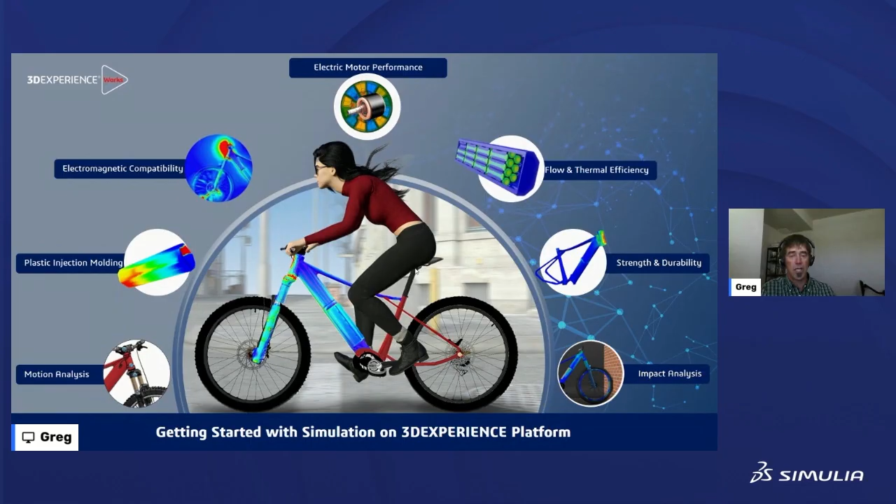How do we do strength and durability, impact simulations, injection molding, motion analysis, electromagnetics, because this is an e-bike. Maybe we have a Bluetooth cyclometer device up here. Maybe we need to look at electromagnetics of the battery, maybe overheating. So we're going to bring all these together in a full-on story of how someone would go through developing an e-bike. And that's kind of it.

One last slide. And again, this really kind of comes together at what my goal is. For many years, I have been focused in design or CAD integrated analysis solutions. One of the difficulties that we have as industry experts is there's not really enough simulation experts out there to accomplish all of the problems that we have before us, or all of the type of simulations we want to perform. If we gathered all of the high-end skilled traditional analysts in the world, we could probably fit the majority of all of them in one soccer stadium.

I mean, soccer stadiums are big now, right? We saw the World Cup this past year, and they're getting big. But really, if you think about it, that's not that many people. And across industry, if you think about one typical organization, they may have one analyst specialist to 10 or maybe even 20 designers.

And so my goal, again, is to bring those communities together, enable more people to be able to do more simulations, no matter what your skill level is. You can do this as a design verification, validation tool. Maybe just make some simple changes to the model, see how it performs. Is it going to deflect more? Do I change where my stresses are? Of course, we want to know if our parts are going to break, but sometimes we can just use it as a simple design tool to find out where our high stresses are, or how it's going to displace.

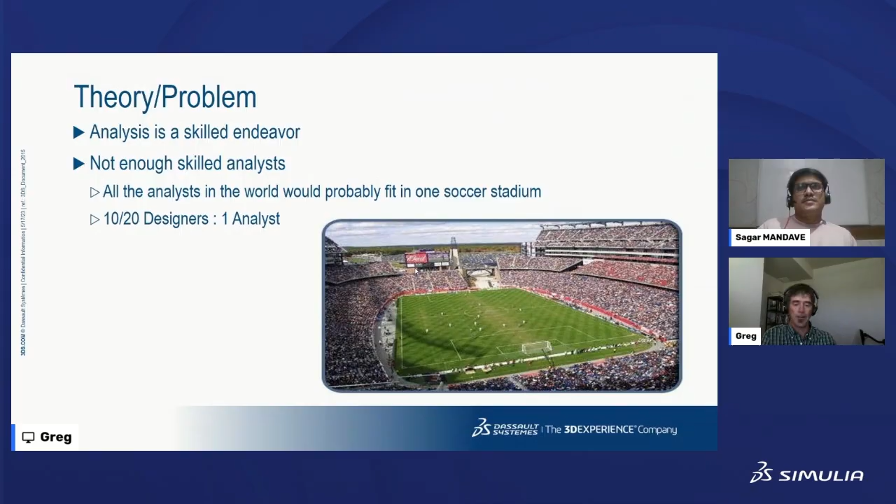So there's a lot of advantages, from a high-end simulation, electromagnetics or whatever, to just basic rudimentary using it as a design tool. And so that's my goal, is to really bring those communities together and get more people using the software so you can design better products faster. All right, that's enough. Yes, Greg, I do agree with you. If you get the insights of a product well before it's manufacturing, then it's way better.

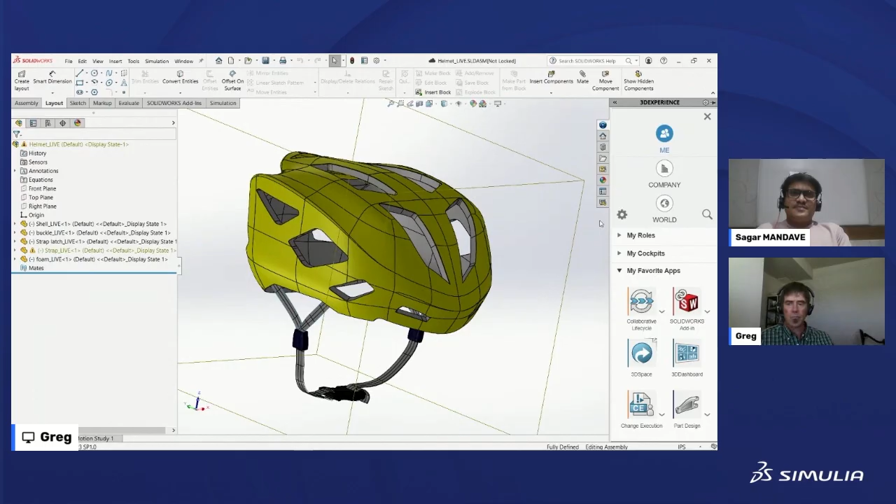So part of riding a bicycle is wearing a helmet. And I thought this would be a really nice place to start, rather than going into a complex assembly with weldments and different things like that. I want to give you a brief overview of taking a product from design through a quick simulation. I'm by no means a good SolidWorks user. I know enough to get in here and basically take some stuff from SolidWorks to 3DEXPERIENCE, because that's where my skill set is at.

So we have this part. We can see over here, it's an assembly comprising some different components. And one thing that you'll notice I have over here on the right-hand side is a simple add-in that enables us to start to interact with 3DEXPERIENCE. So you're able to work in your normal SolidWorks environment.

Immediately when I hit save, even if I go and hit save up here, what happens is that if you're connected to the 3D Experience Cloud tenant, it will take this information and save it in that particular cloud tenant. And the great thing about that is now everything is connected. So in the end, when I start to create some results and I have some simulation displacements and stresses,

I'm so bad at organization. I have a folder system. Me too. Yeah. Especially, you think engineers are type A people, but yes. I'm maybe like a type A minus. Who knows?

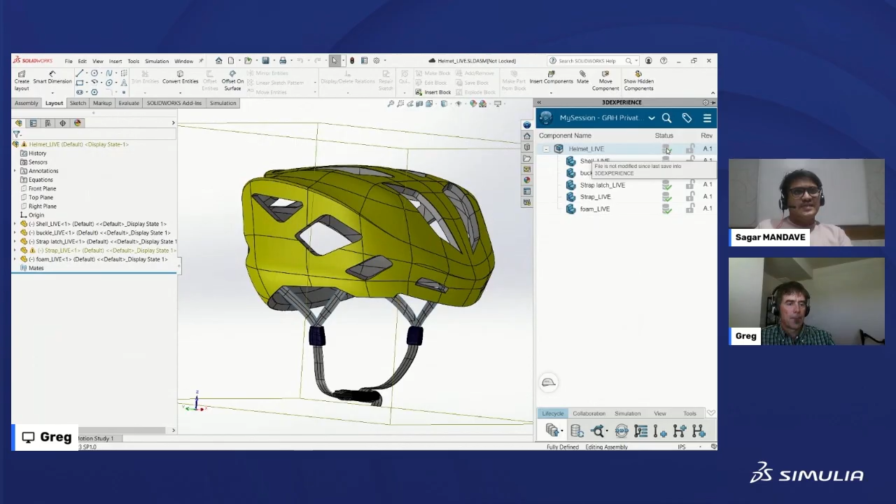So Greg, if that green tick is there, that means it is saved on cloud, right? Yeah. That green tick means it's saved on cloud. Prior to this, I had to do some setup. I had a little yellow "click me, save me to the cloud." So it would tell me here that it was only saved locally on my desktop and not saved to the cloud. Yeah, exactly right. See, organization. It even tells me if I've saved it or not, right?

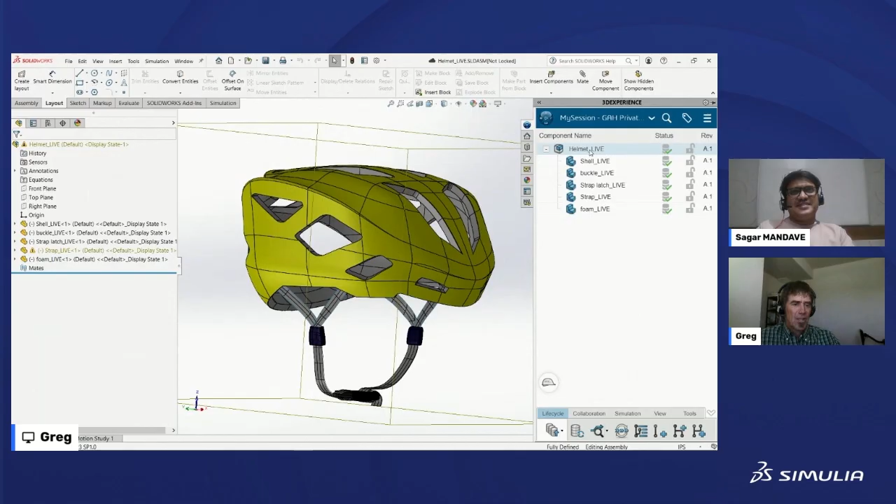Yes. So I can highlight any one of these parts, and if I want to go right to creating a simulation, I have this nice little tab down here, and I can pick simulation, and it will launch 3D Experience. It will start to create the structure that it needs for a simulation. But I'm a little old school. I like to do things a little bit more manual.

So when I clicked on the compass here, that shows me all of the roles or licenses of things that I have access to. And obviously I work for the company, so I have a lot of access. Maybe they should take some of my access away. But no, you are the prime expert from us.

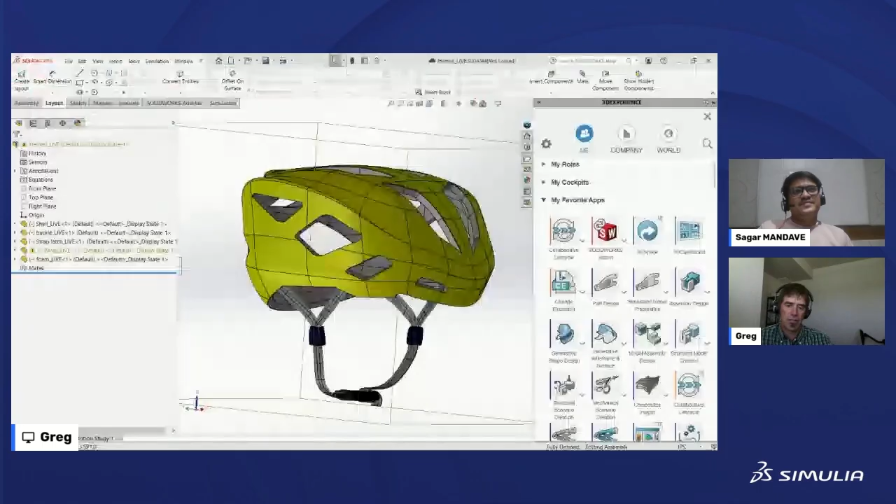Yeah. So I'm going to select something called Collaborative Lifecycle. This is my favorite one to launch in. It basically launches 3D Experience into a data management sort of environment. So we can see 3D Experience is launching here, and it launched in a screen behind. So now I can just Alt-Tab to the screen here, and we can see here is that helmet that loaded inside of my 3D Experience session.

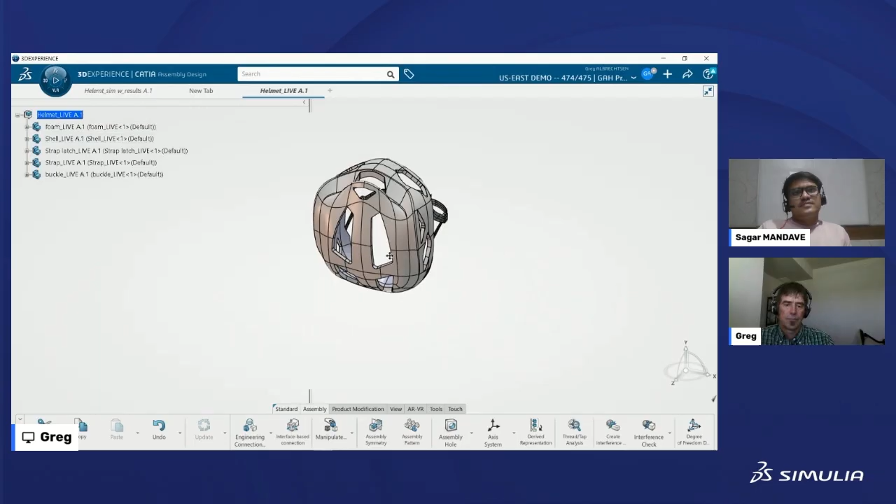So the only thing I need to do here now is just go ahead and right-click, open it. And there we go. Now I have the helmet. So we can see it has the same basic structure. I have a compass. All this. Nothing is left behind. He has carried everything. Yeah. Right.

I'm not going to get into this today, but if I had created a SolidWorks simulation and done the same thing, that would have brought the SolidWorks simulation in here and put it in 3D Experience format. So it would have brought the mesh over, the materials, the loads, the boundary conditions. As long as those sorts of items are supported here, it would have brought those over, and the majority of those are supported.

So again, if you just want to add that higher level of fidelity or a more expanded level of simulation, we can go ahead and do that directly here as well. One of the other things that's really nice is this is the structure. So if I start expanding this, I see this little do not enter sign.

What that means is the write privileges to modify the geometry have been retained in SolidWorks. So I can defeature, I can do all sorts of geometry prep here, but the actual authoring and ownership of the model to modify the features and parameters and those kinds of things, that still exists and is managed by SolidWorks. And so that's kind of a nice thing to think about.

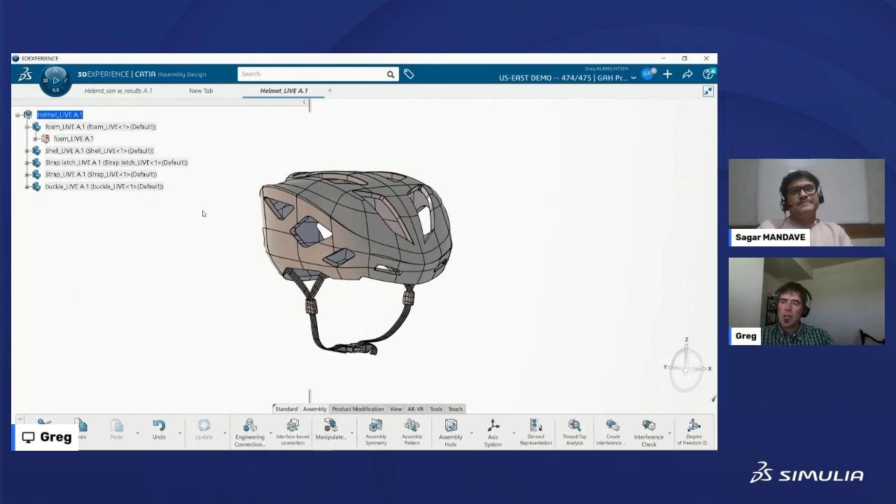Yeah. And I think in a later session when we start talking about optimization and design of experiments, we'll talk about how features or parameters can move between the two systems. So let's create a simulation, right? That's why we're here. So I'm going to go up to the compass. We have a lot of different tools, but I'm going to go to something called mechanical scenario creation.

And this is going to create the structure that I need for a simulation. You'll notice it didn't look like much happened, but I have a new simulation tab up here. My helmet is now under this physics simulation, and it's asking me some questions. The first thing it wants to know is what type of simulation am I going to run. I'm just going to take a lot of defaults today and keep it with general, so a basic static simulation.

If I had already meshed this model in a previous simulation, that would show up here. And that's one of the great advantages: I can reuse meshes from other simulations. So if I'm running various types of load cases, I don't have to mesh it every time. I can just reuse. And that extends through this whole scenario. But I don't have a mesh, so let's make one.

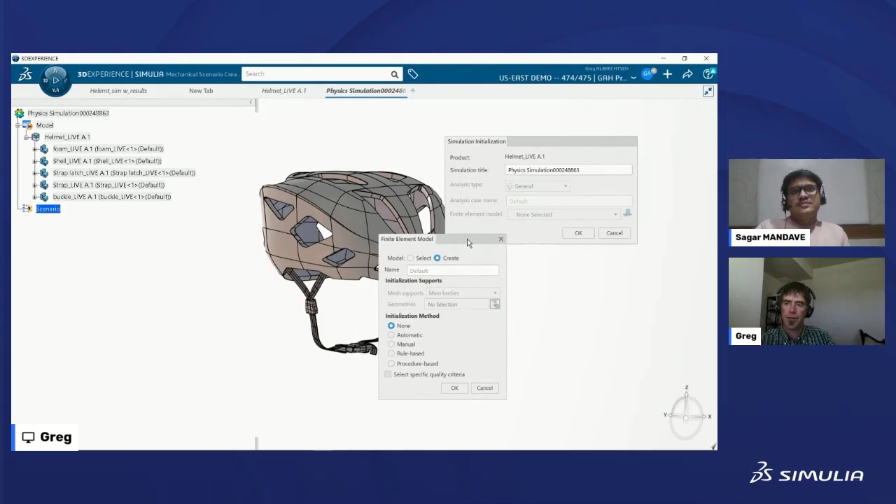So I'm going to create something that we call a finite element model, finite element mesh. I have a number of ways to do this. If I just hit automatic, that's going to look at this tree here, and it's going to create an element placeholder for each entity in here. I don't really care about the straps and stuff like that. That's not really going to pertain to the model.

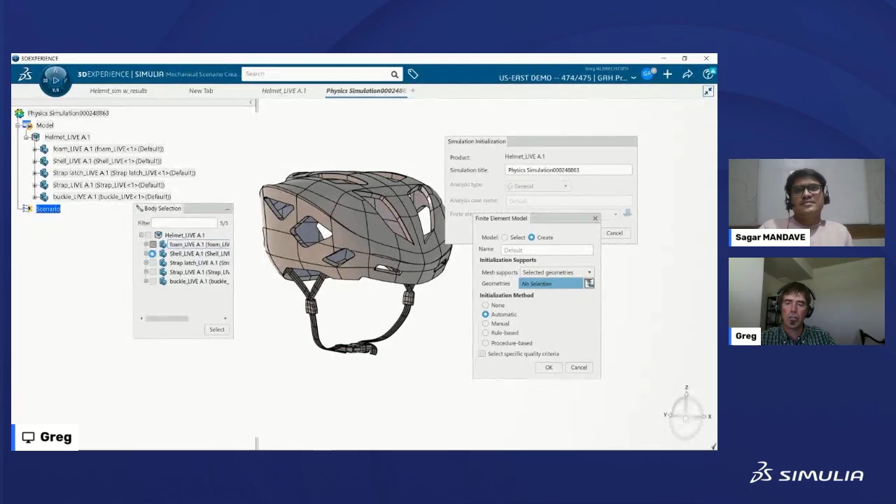So classically, you'd be like, oh, shoot, I need to go back to SolidWorks and remove those, but I don't need to, because in this model I can basically just tell it which items I want to include in my particular simulation. So I am just selecting those items that I want it to create a mesh entity for. I just selected the foam and the shell.

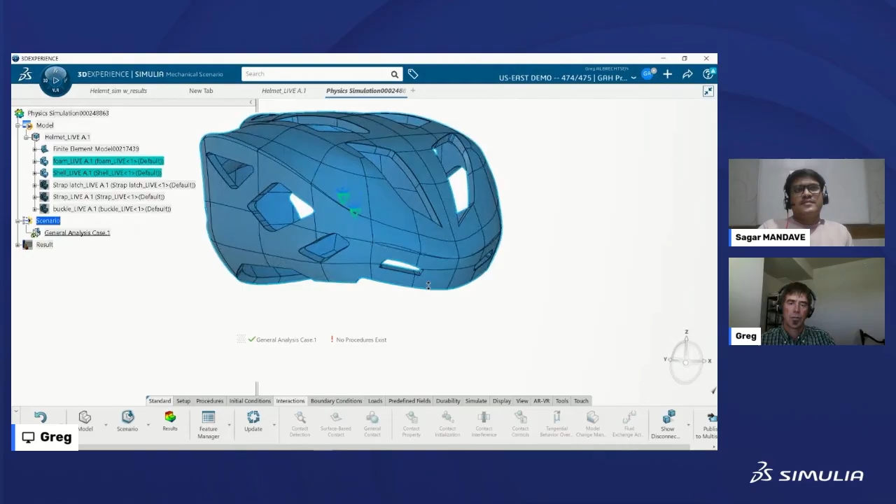And all these parts will stay in the history of the assembly, but when it creates the actual simulation, it's going to hide them, remove them. So that's pretty nice. I can still keep the integrity of this model. Maybe if this is a bike, I want to just run a quick simulation on the frame, and later down the road I want to add those other components in, I can do that. I can come here and add or remove items as I wish.

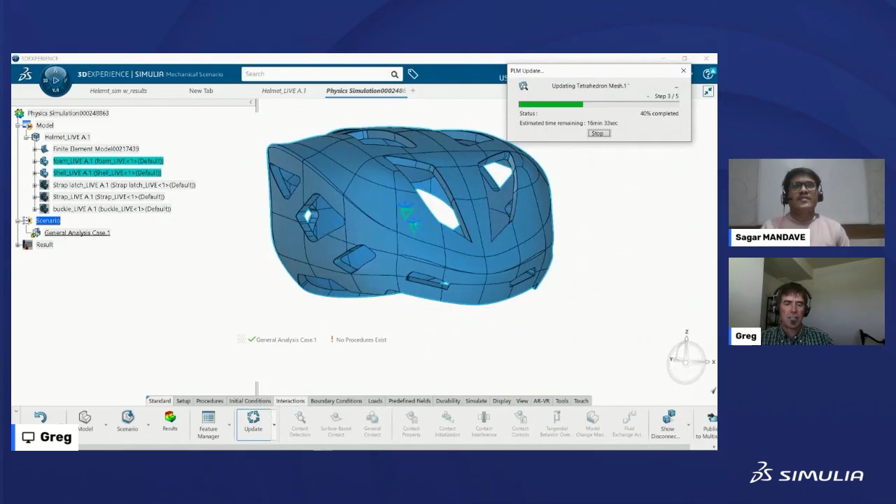Okay, let's go ahead and hit update. You can see it assigned a default mesh size here. I can go in and modify that, change it to whatever size I want. I'm just going to go ahead and do the default. I'm going to close that.

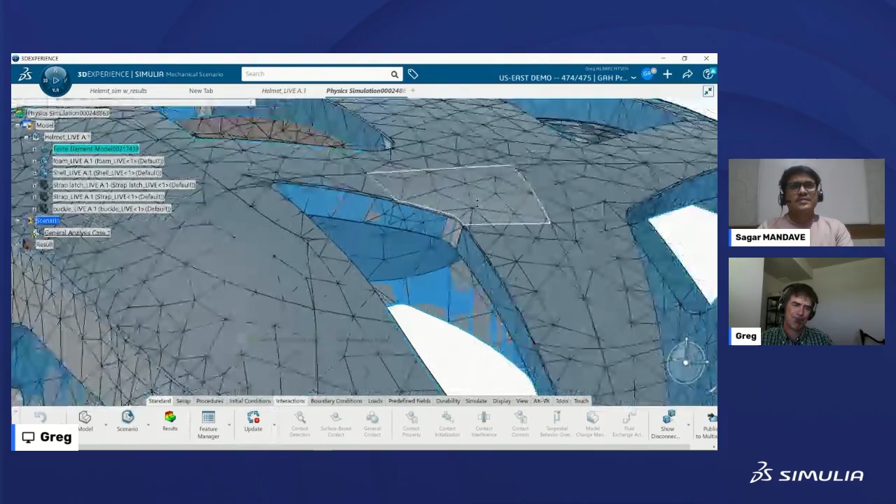We can see that my foam is pretty thick and my shell's pretty thin. If I'm meshing something this thin, it's probably not a good idea to use TETs. For the foam, TETs are perfect, they're fine. But for the shell, TETs aren't going to be a good thing to do.

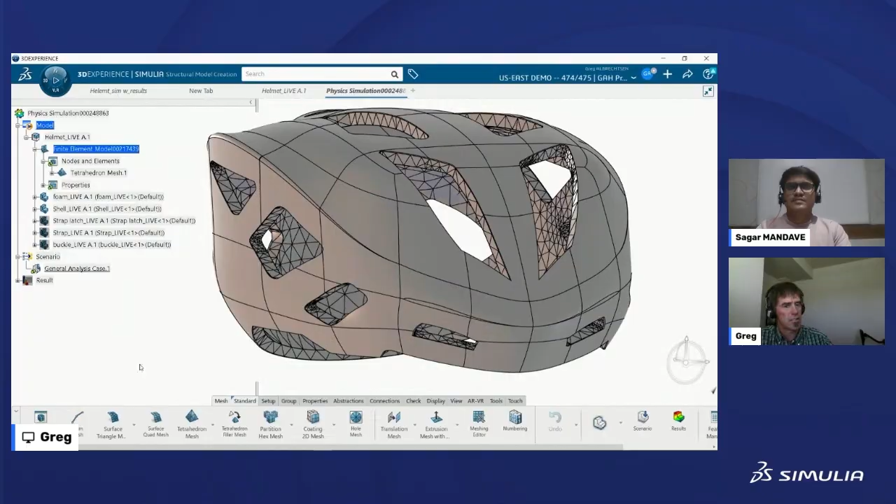So what I'm going to do is override what the default mesh told me, and create a manual mesh that's a little better for that foam, or for the shell. Let me hide the foam, hide this thing. I can do all sorts of stuff, work in a different little context.

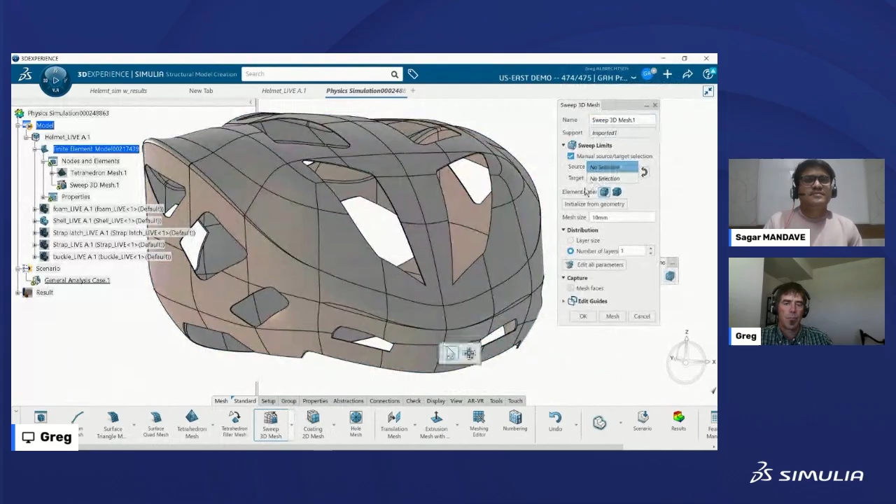So what I'm going to do, I'm going to create a hex mesh. And I'm going to pick this for my item. I want a hex mesh, and I'm going to basically create a sweep hex mesh.

We have a nice tool here that allows me to pick the inside surface. Let me get some dialog boxes out of the way here. I'm going to say propagate, and that's going to pick all of the inside surfaces. And I'm going to say I want to sweep to the outside. Move this back over here.

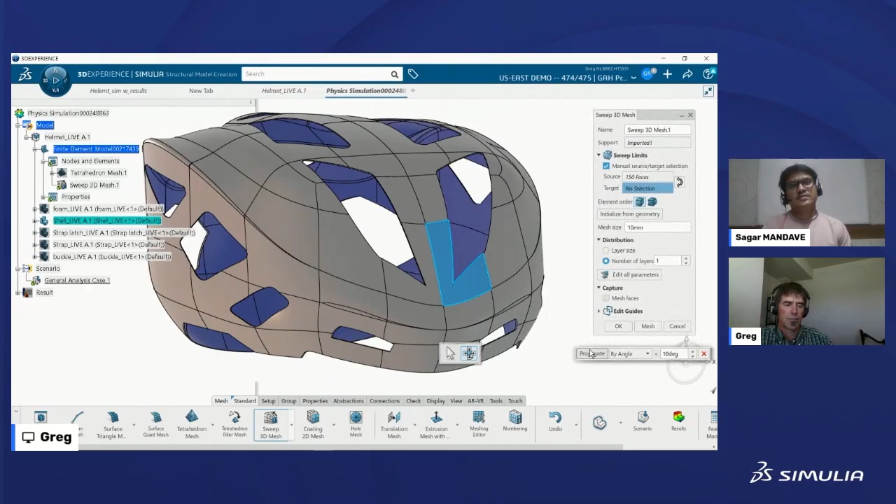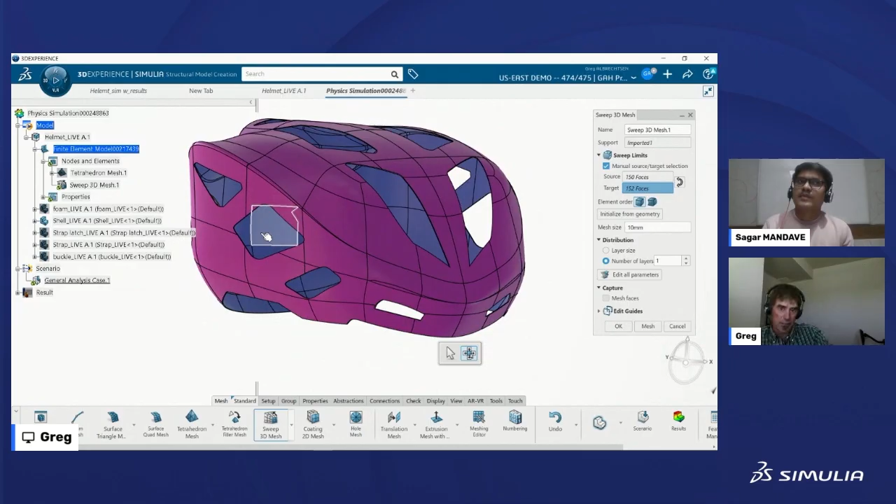So you are creating mesh for the shell from the bottom surface to the outermost surface, inner surface from the outermost surface. Yeah. So basically the software is going to create a quad mesh on this inside blue-purple surface, and it's going to sweep or extrude that through to this other purple surface here. And that allows us to create a much better mesh that has better refinement for this type of simulation.

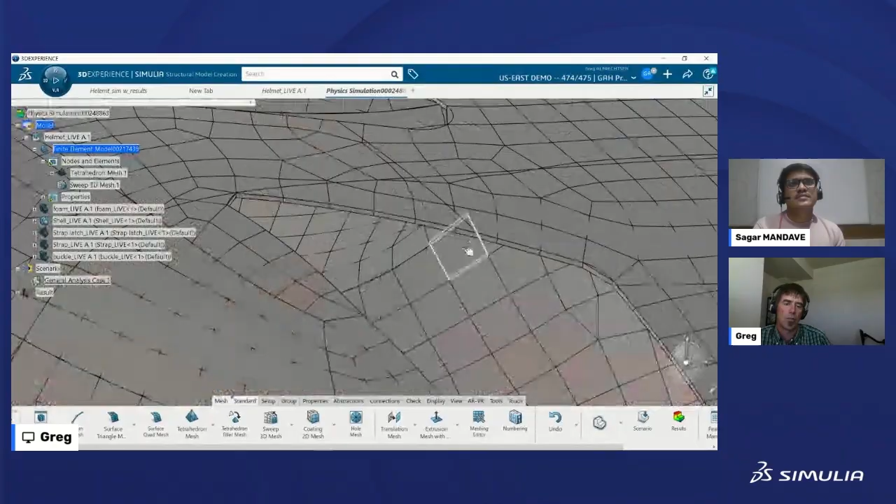And we have some really nice advanced tools in here. You still might be thinking, hey, that's still only one element through the thickness. Well, we have some advanced analysis capabilities where I can mesh this as a solid hex but use shell theory through that. That gives me really great accuracy with just this basic simple mesh, and I can still model this all as a solid. I don't have to do any mid-surface extraction and figure out what to do with the gap between them and all of that. It's a really, really nice, neat process.

Okay, so there we go. We've got that meshed.

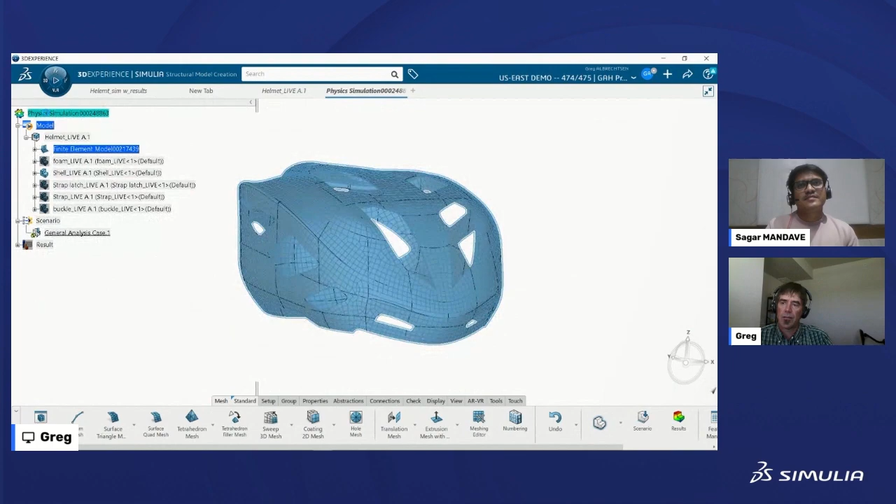It's very contextual. I'm going to double click on the physics simulation up here. We can see my workbench changes down here. I'm going to go to setup, say a procedure, and just take the default. I'm just going to do a static simulation.

Whoops, I need to turn my foam back on. I'm going to hide the mesh because I don't want to look at it anymore. So we'll just have a look here. All right, let's add some boundary conditions.

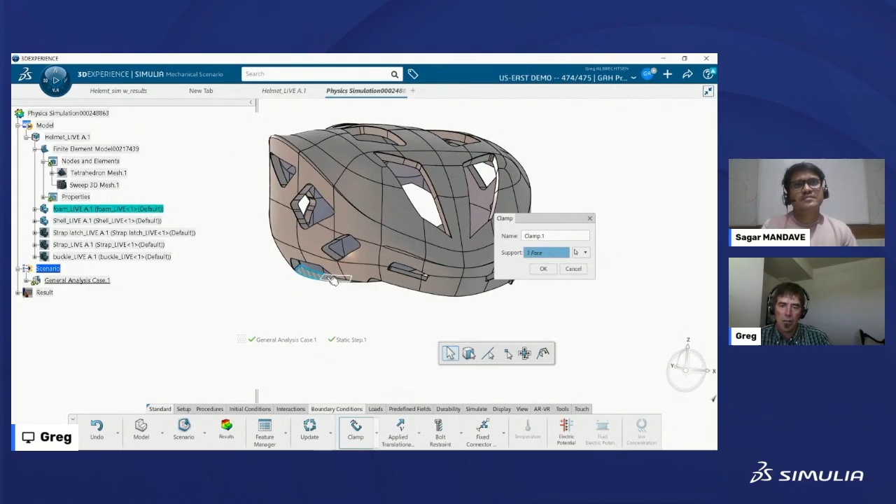I'll just go ahead and clamp maybe here. Spin this around. Clamping. Doing pretty good.

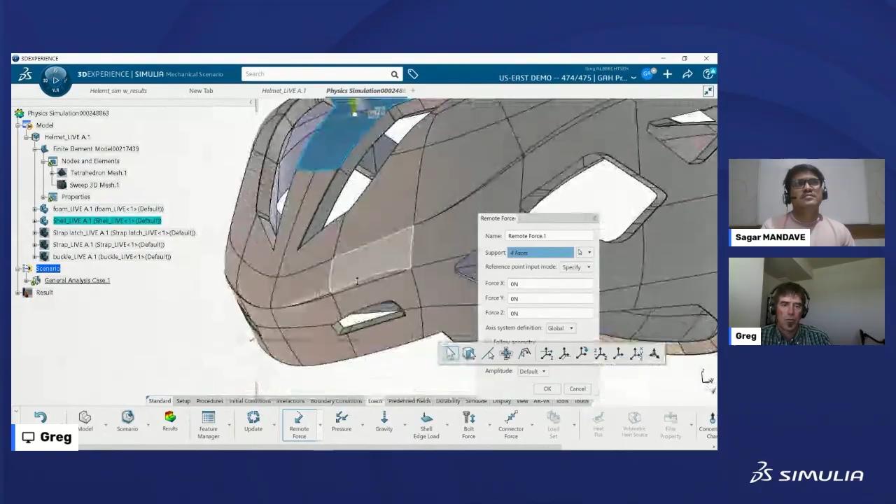And let's go ahead and put a load. Select loads, lots of different types of loads. I'll say remote force. Let's just go ahead and pick those for the force location. Maybe we'll simulate an impact to a tree or something like that.

Watch what I do here. So this says newtons, but I live in the US, and we have no idea what a newton is. So I'm going to say pound force, and it just converts it for me. So that's awesome. Yeah dude, it's so awesome, it's so great.

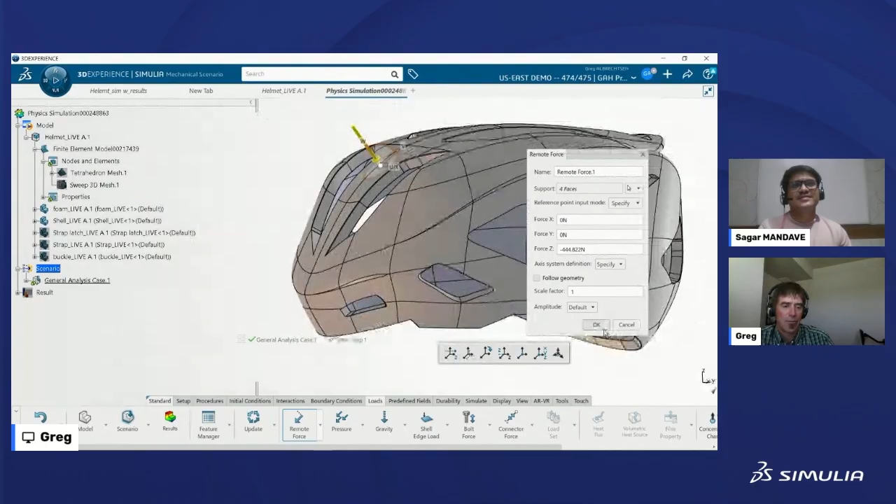And then, the other thing is, I get a little compass out here, and I can get really detailed, or I can just kind of click and drag the orientation of that, whatever I want to do. And there it is. Oh, you might think, well, what about the interaction between those two? That's just going to go straight through.

Yeah, right. So we have something here called general contact, and what that does is during solution time, I don't have to pick all of my contact pairs. I don't have to say this surface and this surface touch, and this one touch. It says, when you're solving, just look at all of your surfaces, all your element locations, and the software figures out if stuff is going to touch or not. It's a really nice way to handle complex contact like this, where I have all these crazy little surfaces back here, and I don't have to deal with it.

And that's it. I basically just send this off to the solver. And now, as the magic of cooking shows have it, I reach over to the oven and pull out my fully cooked bread.

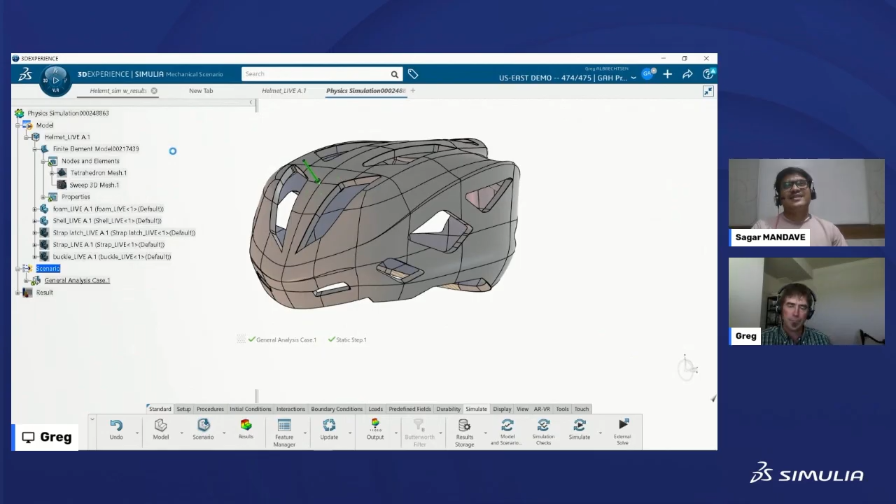We can have a look at my fully cooked bread here, so we don't have to sit and watch it bake. This simulation probably only takes a couple minutes, not that long. But here we go. Now we have our solution here, and it's really that straightforward.

To put a simulation together on the platform, it can be as simple as this, or it can be as complex as we need it to be.

So when I save this, it saves to the database. It's still attached to the model. If I go back and change that SolidWorks geometry, all I have to do is hit the little update button. That new geometry comes in, and I rerun it, and that's it. It's that straightforward.

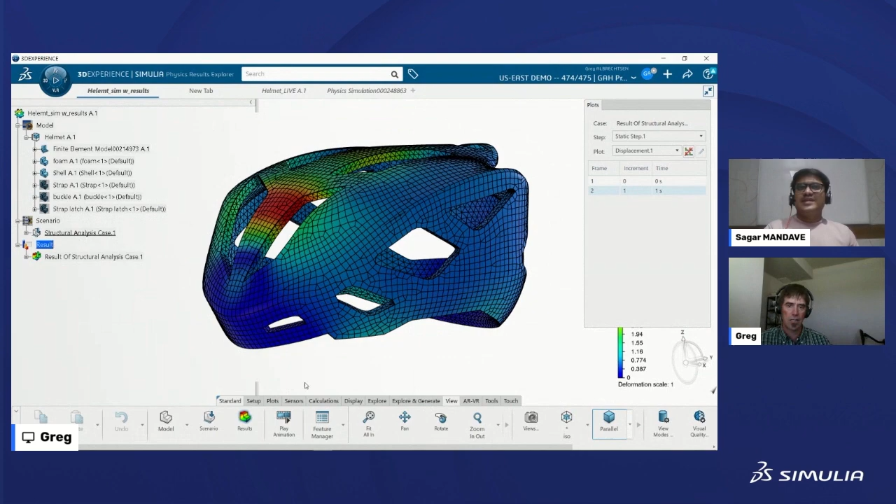That's awesome. The color contour on the helmet, the displacement levels at the different points, looks amazing. It's really easy to interrogate the models here.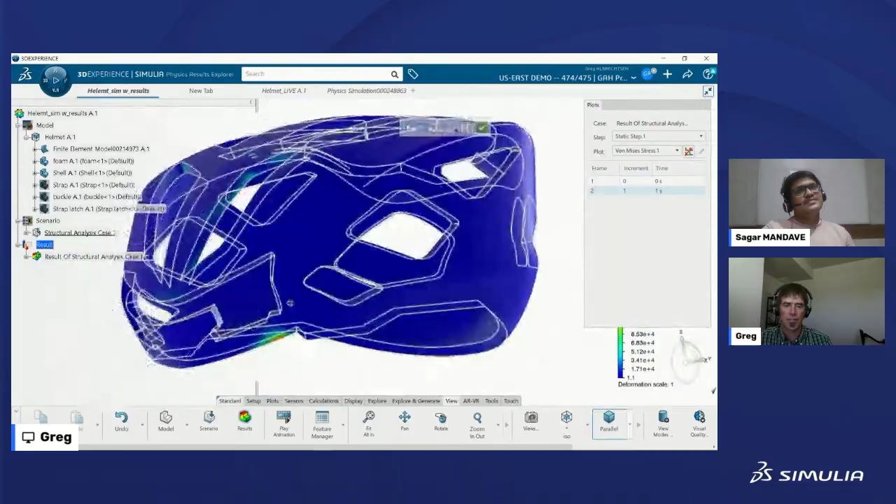We've got all sorts of other little flip ups. If I just want to look at the stresses on the foam, then I can just look at the foam itself, turning other things on or off. Can turn it all back on, and go ahead and start to interrogate the model.

And that's kind of it. It's pretty cut and dry, pretty straightforward. That's really what I wanted to cover in my portion of this session. And as this series keeps going, we're going to add complexity to this. We're exploring different topics like eMAG, plastic, motion. Everything will be covered as we go ahead.

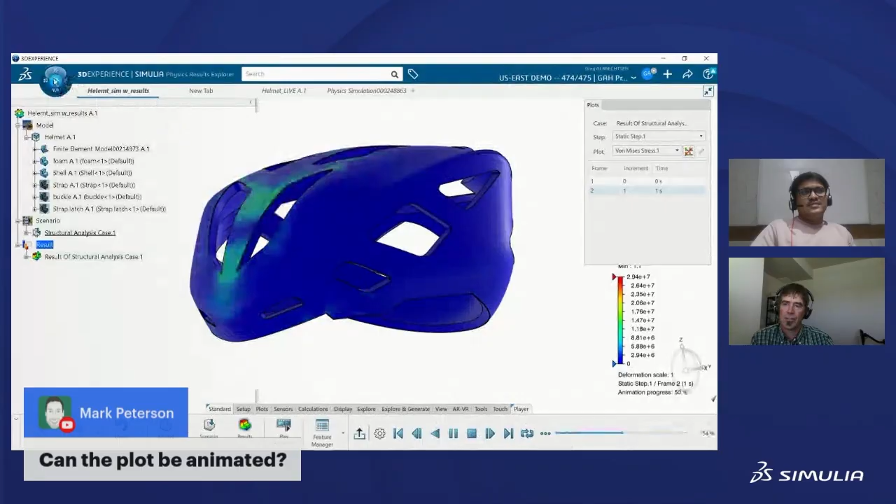He's asking, can the plot be animated? It can, yep. The plot can be animated, just like that. I just hit this little play button up here, it starts to animate it, and I can still spin it around while it's being animated.

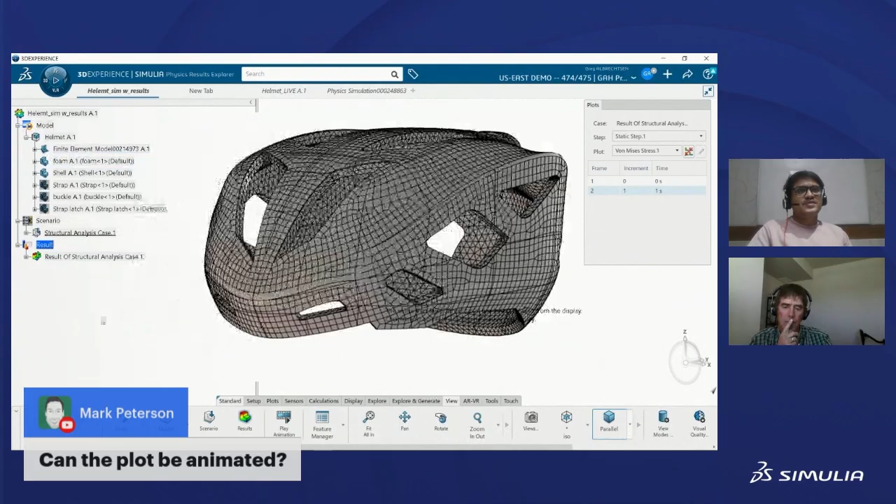You can export this, save it as like a little MPG file. Lots of other types of animation things you can do. Whoops, I think I just hit everything. But basically you can plot the animation, capture the animation of deformation, different stress contours. Yep, you can capture all of that, no problem.

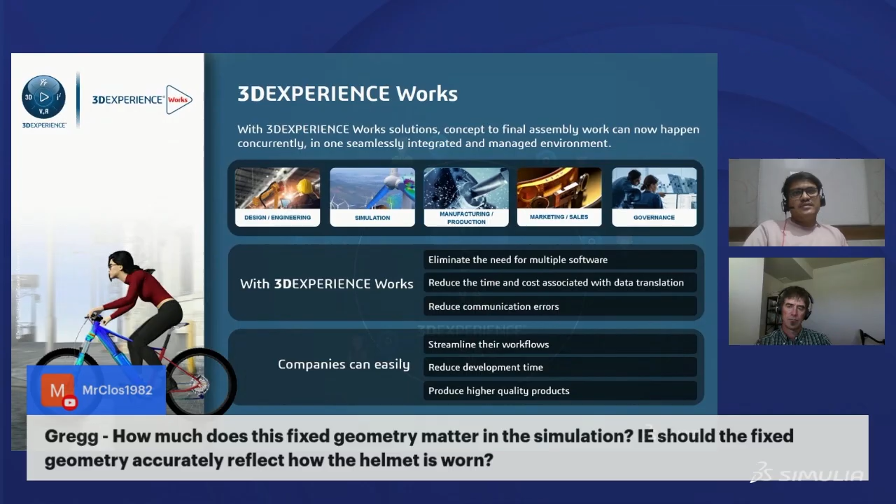So I will go deeper with the actual dashboard to explain to you what 3D Experience Works exactly is.

The one thing I noticed on that previous slide is that the rider on the bike doesn't have a helmet. Yeah, we had a word about that this morning. We can give the rider a helmet for sure—you should never ride without a helmet, from a safety point of view.

So now I'm sharing my second screen where the actual dashboard is. Can you see my screen now? It came up and then went away. There you go, now it's back.

Perfect. So we are in the platform UI, the 3D Experience Platform Compass, where you can directly get to know about the 3D Experience Works portfolio. Under here you have 3D Experience Works where design—these are the domains this portfolio works in. Let's say I'm exploring the simulation domain.

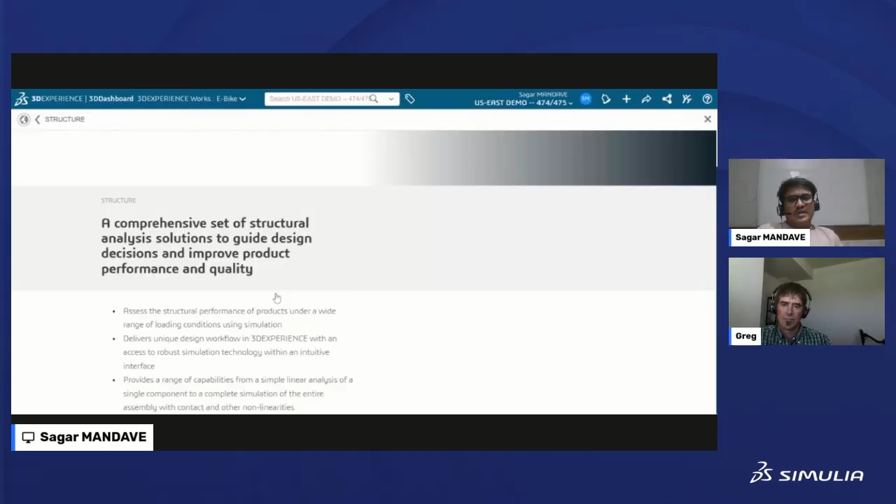So as you see, 3D Experience Works portfolio spans across these domains, and under simulation, this is a domain we cover throughout the year. You will find these many subdomains: structures, computational fluid dynamics, plastic injection, EMAG, motion, and simulation review.

Under these domains, we offer different roles, and under different roles you will see different apps. For structures, these many roles are there. So if your structural simulation is static or non-linear, you can perform that, and even durability analysis simulations can be done using this workflow.

So a role is like a pre-packaged set of capability in the platform? Yes, these roles come up with different apps. Currently I'm in a structural designer role—you get access to these many apps, and using these apps you set up your simulation, collaborate with others, and manage all the simulation-related data on the cloud. So it's a complete package—a role is a package, basically.

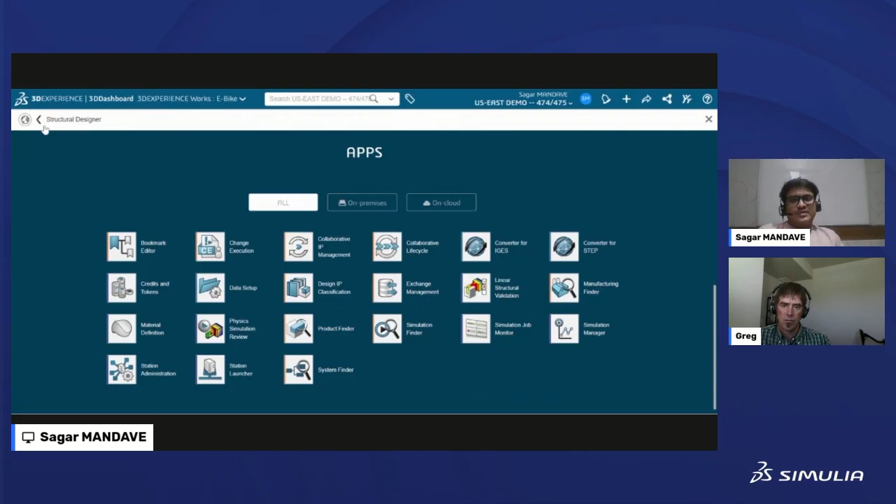So this is all about the 3D Experience Works portfolio. Now let's talk about collaboration.

Currently I'm in the UI of the platform 3D dashboard. This is a dashboard where you can see your dashboard name—currently it is 3D Experience Works eBike—then your profile and your cloud name. The bell icon is for notifications. The plus icon is to add a dashboard or tab related to your work—you can add a story, you can add a widget. Then this is a share button, which lets you share this dashboard directly with your teammate, or whoever has access to this demo tenant or cloud.

And these three dots are the content, where you can directly access your content from the dashboard through this icon. And this is the 3DSwym community icon. So right now I'm in the dashboard UI. If I want to switch into the community UI, then straight away go and hit this button.

So what's swimming? I can't swim. I don't know how to swim. I live in the mountains. Yeah. Remember that? Yes, we don't swim here.

Yes. So 3DSwym is a platform app. It is a community app. So right now you are seeing the 3DSwym widget over here. Here you can see communities and conversations. Communities connect people and data through live and engaging experiences. So here you can add your post, your idea, your questions, your media, whatever you find about your project, you can simply add it over here, and it will be available for a good set of people who have access to this particular community.

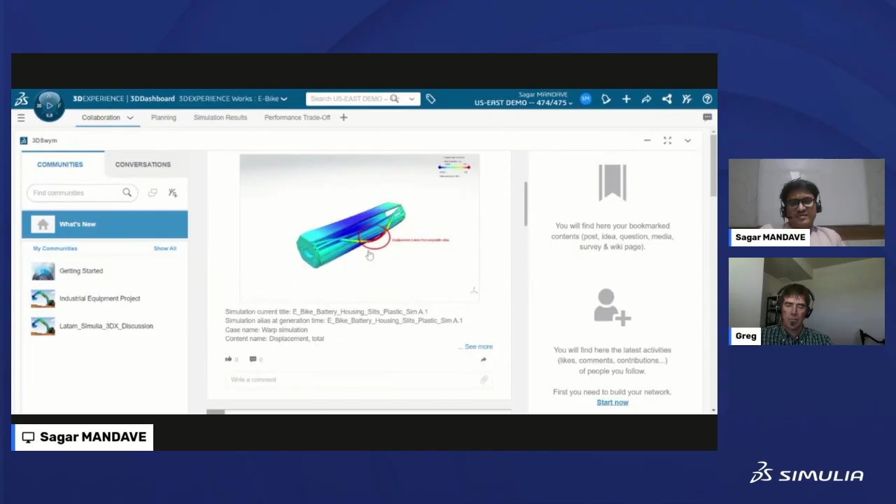Okay. So it's not really a news group, but it's kind of like that, where if you have questions you can post questions or just share information with other people, and so it's a place to collaborate. Yes, exactly. You can take a snapshot of your simulation. You can add your comment. So if you see this one, this is a battery casing of an e-bike. The deformation of this slit is way higher, which is beyond the acceptance limit. So I particularly circled it out and made a post in this particular community.

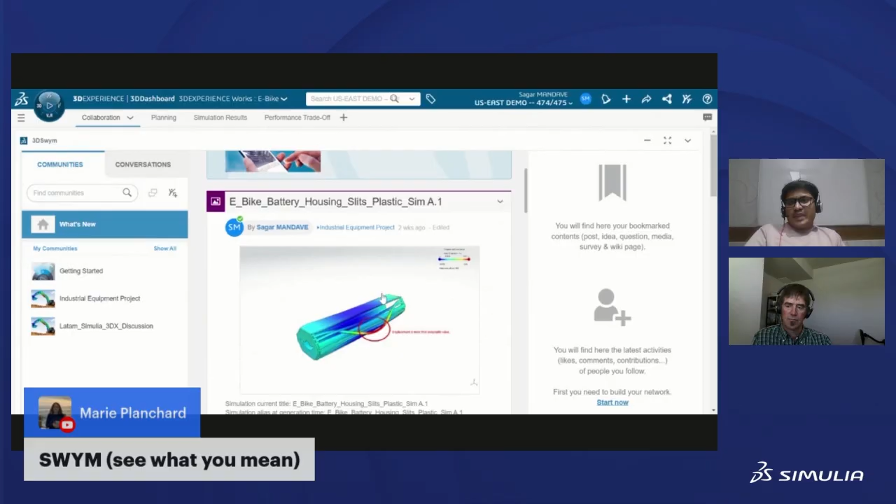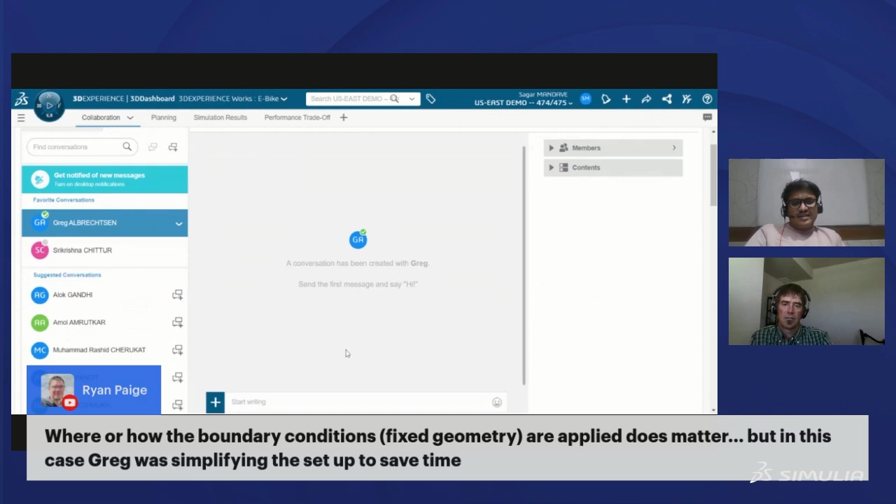Gotcha. Again, you can have a conversation with your teammates and colleagues. Right now I'm with Greg, and this is a conversation where I can type whatever I want. I can have a chat with Greg. These conversations will be for a limited group of people, and you can save them for a long time. You can pop up the timeline. You can add to the timeline as you go on. So this is about the 3DSwym widget. And

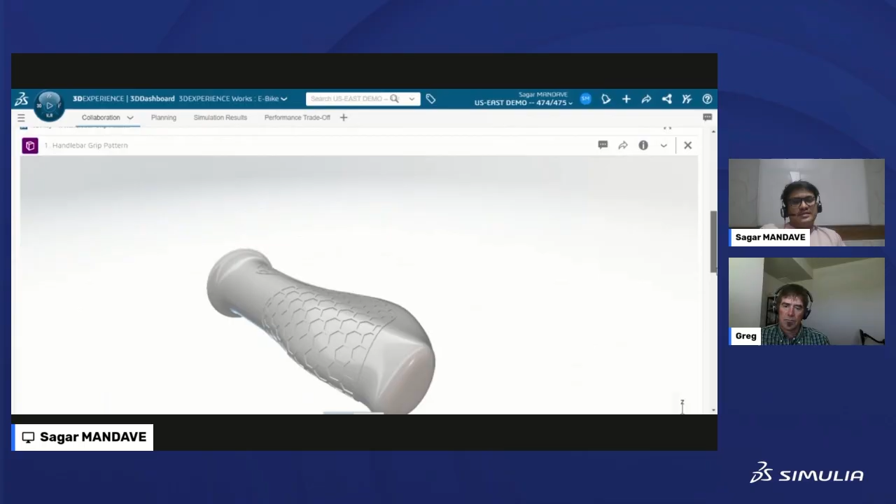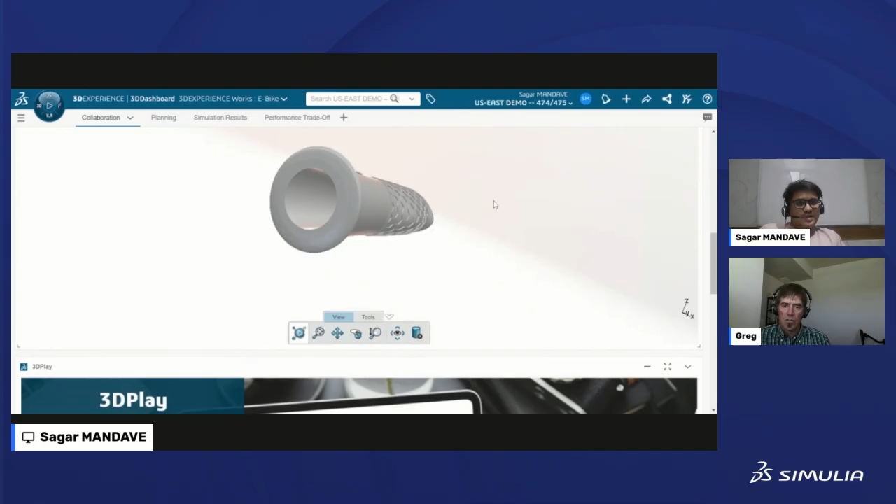yeah, this is a very cool widget, 3D Play, where you can see your geometry in real time. You can rotate it, you can zoom it. So these are the different commands on the action bar for view, for rotate, for zoom in. And the best part of the platform is if you go to your profile and under preferences, oh, it's popping up, you will get the commands on language and mouse control.

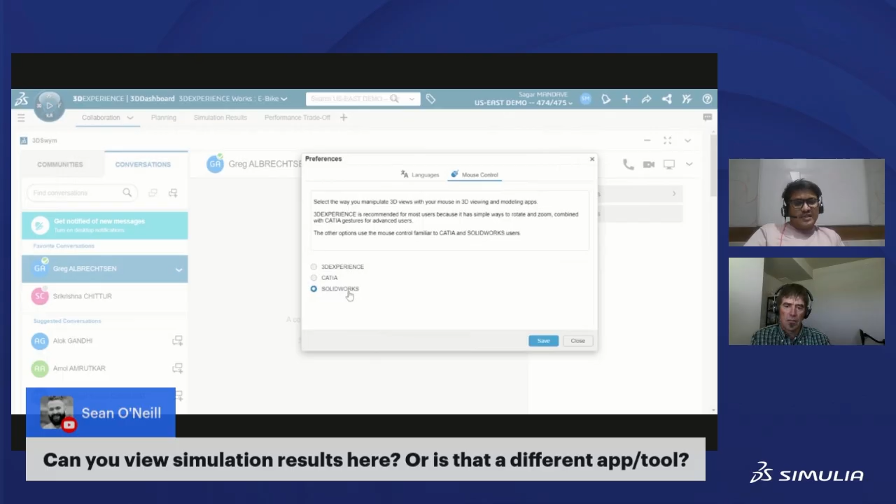So if you are anywhere in the world, you can set your language for the platform. And for mouse control, if you are basically a SolidWorks user, you can set it for SolidWorks. If you are a CATIA user, then hit CATIA. And for 3DEXPERIENCE, if you are working on the platform, then just hit this button. So I'm keeping it as SolidWorks. So whatever mouse controls are there for SolidWorks, you can have them over here. That's cool. No confusion.

So this is a web browser, right? This isn't what I was using to design with. Yes. So anything that you can open a web browser in, you can view this. And is this just for parts or simulation data? So whenever you are in 3D Play, whenever you are handling CAD data and simulation data, you can have these preferences. Not only on a web browser, but if you are in the platform, you can also set your preferences, and accordingly you can work in the platform UI as well.

Okay. So I could share this with my design manager, who I don't actually want to touch my data and mess it up. I could just share this with them so they could see my parts and my results, right? Yes, exactly. And they don't have to have a heavy client installed or anything like that. Correct, correct. You got me. Okay, cool.

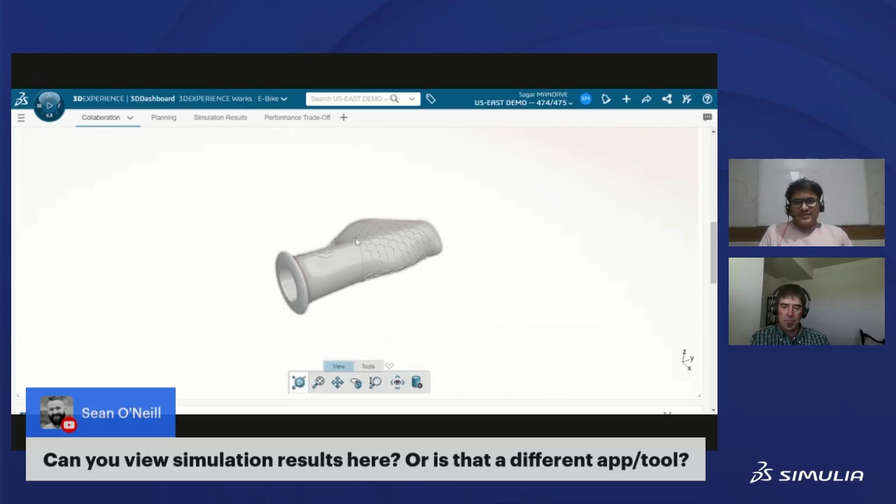Yes. So these are the tools to view your 3D model. But if you go to the tools, if you have an assembly over here and you want to hide some parts from that and look into the inner part, then this is the icon or command you can use.

But right now the handlebar grip is a single geometry, so I'm not going to demonstrate it, but it is there. Also this is explode. So likewise, if you have an assembly and you want to have an exploded view of it, then you can just click on that. The geometry or the assembly will explode. You can have details, or you can see each and every part.

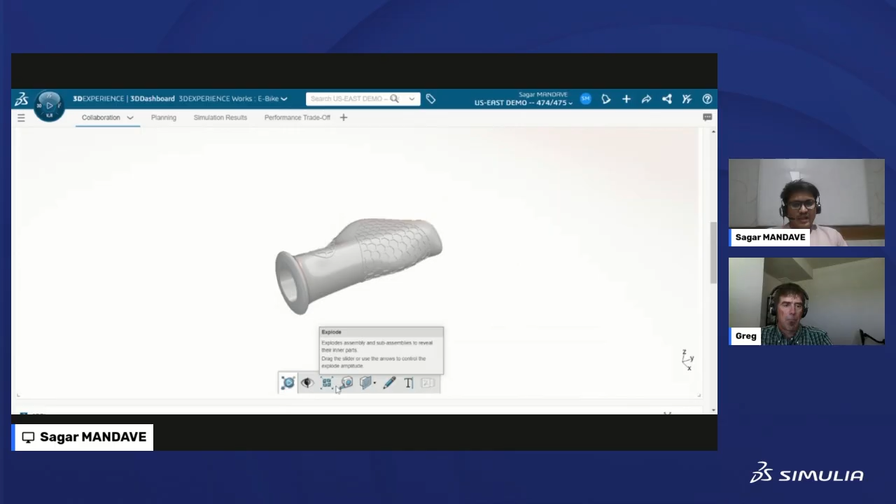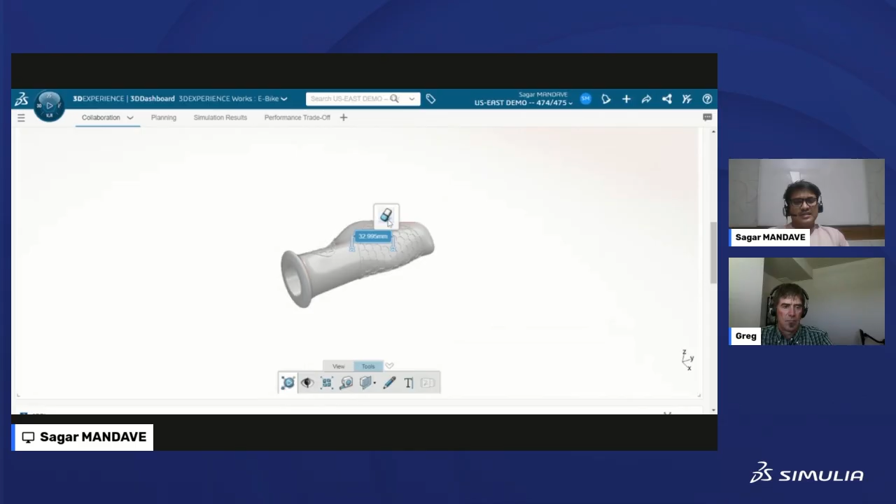You can measure. So let me show you that if you want to measure distance between any particular point or the angle, you can do it over here. So I have selected these 2 points, and it is telling me that they are 32.995 mm apart from each other. And you can erase that way. This is what I love about this.

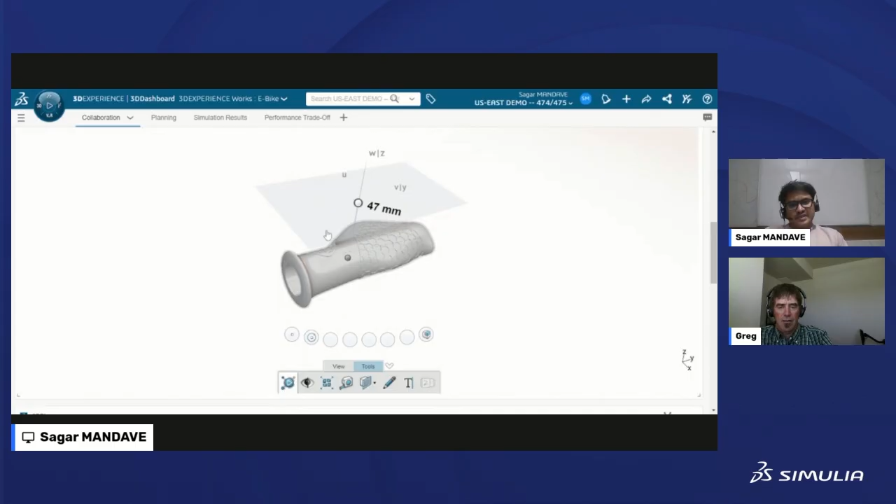You can see the section view. So I'm handling that handle gripper. I want to see what's inside that with the different sections. So simply by moving the plane, you can see how it looks like when you have a section. Oh, that's so cool. I could do that for like an hour.

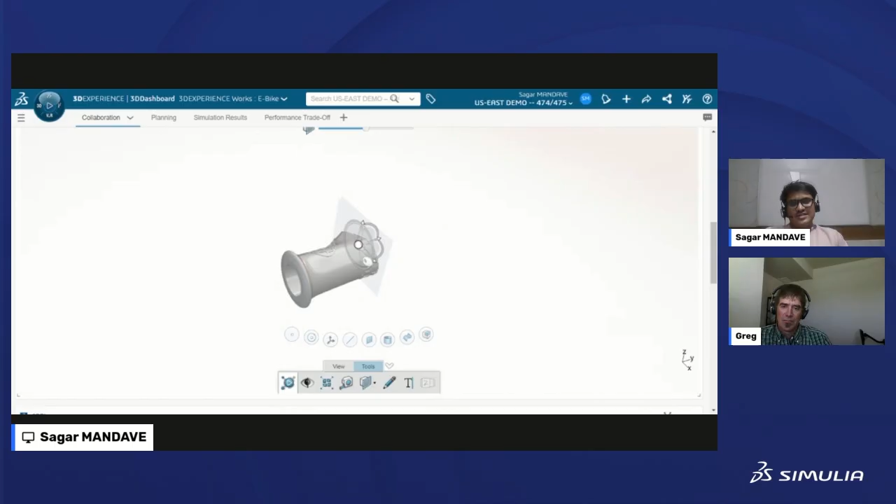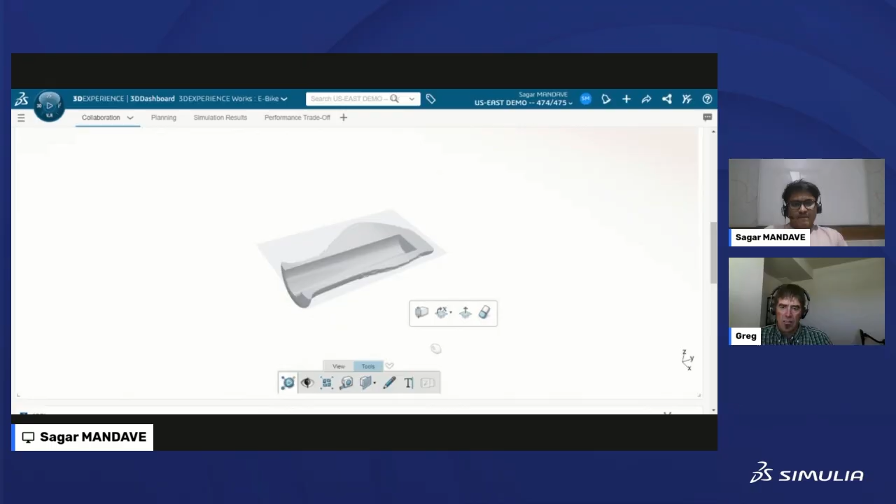Yeah. So right now it is about this axis. If I change, you will see like this. From different orientations, different axes, you can have a cross section view of it. And to come out of it, just hit here. And this is just a part. I assume this would be a great way to look inside an assembly or something, right?

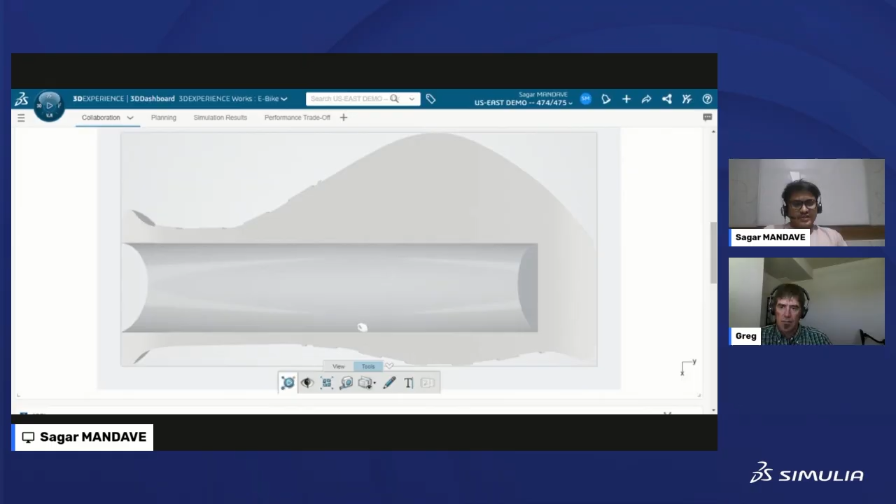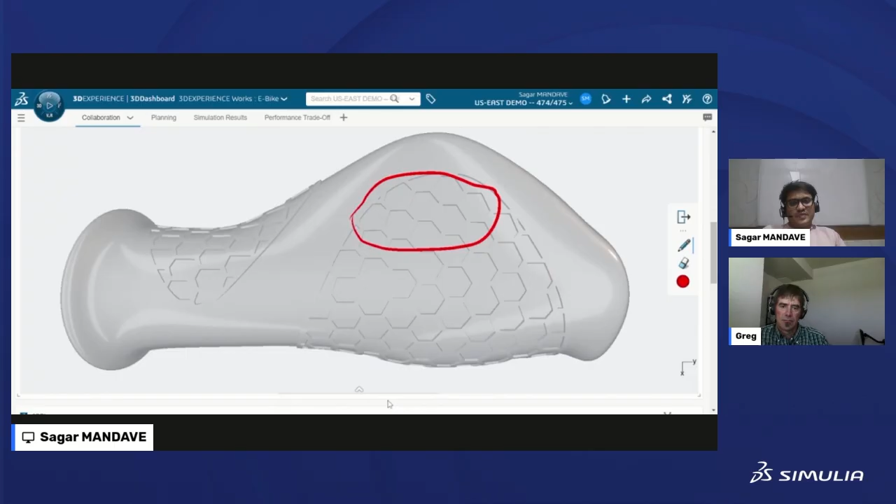Yes, yes, yes. And let's say if I'm in a cut section and I want to have a comment over there, like, I have to share a remark to my manager or my teammate that look, these patterns are not that good. You can go to the annotation, the pencil icon. You can click on that, and let's say if this area is not appropriate, I will circle it out and simply get out of it, and you can add your remark over here. So new text pops up. So let's say it's a remark.

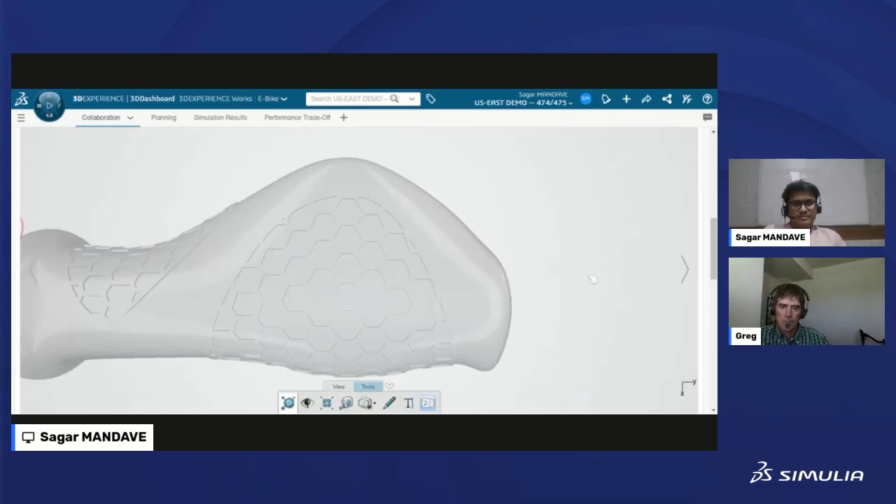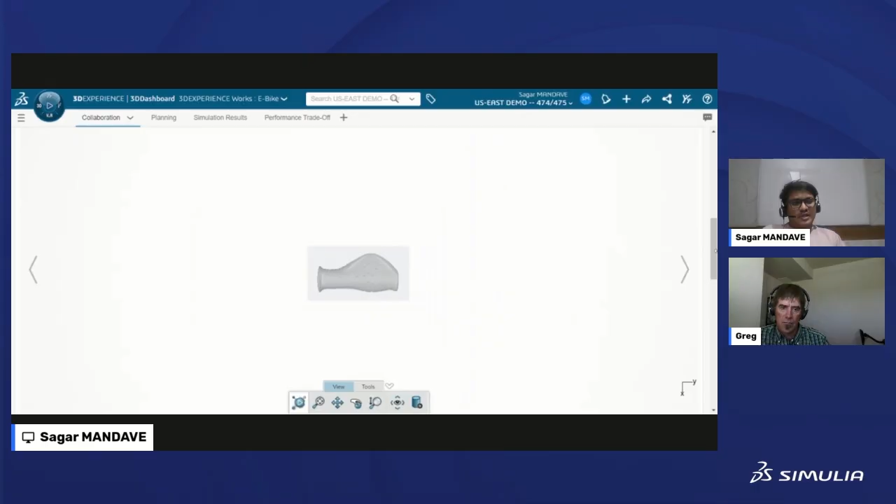It's a remark, and I saved it, and now I want to share this one with the community. So from here only you can directly share your post, your remark to the community that I have showed you in the collaboration tab in the platform, where that snap pops up with your comment.

Cool. So how to get these geometries in a 3D Play? So now let's search for one e-bike frame. I have uploaded it onto the cloud in an e-bike specific collaborative space, and now I'm searching it right from the dashboard from the search window, and you can see over here 26 results are there, and from that you can take the simulation results or simply the product or 3D geometry. So select it and drag and drop over the 3D Play. The geometry will get into this widget very soon.

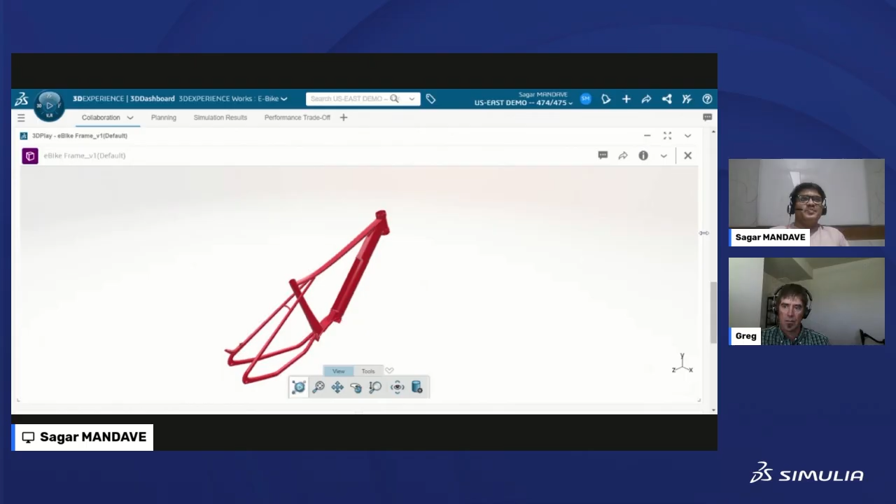Yeah. I mean, this is awesome because you and I are like 12 and a half hours time zone apart, and true collaborative engineering is a reality now, right? We can work on the same thing. So when you go to bed, I can keep working, and when I go to bed, you can keep working. Yes. Absolutely. That's just so awesome. And that's where we reduce the time and we have a better and efficient collaboration. That's what we call it.

Yeah. So this way you can have a geometry or a 3D part in a 3D Play. Then moving onward, we have 3D Drive where you can store your data under My Files. Just clicking New, you can create a folder or upload the file, or directly you can upload the folder from your system. So it's a storage location where you can share data with the people of your team.

And this is Web Notes. I often use this one just to have meeting notes or your work status kind of thing. Or if you have a specific set of links to particular posts or particular videos, then you can collect and keep them here in Web Notes. So these apps are a few. We have a lot, but for 3DEXPERIENCE Works Simulation, these are the main or preferred ones to use for collaboration. Moving forward, let's talk about planning.

Yeah, and planning is a key to success. People say so. If you are better at a plan, you will definitely succeed. Well, along with talent. I need to figure out how to run this desktop then. This one here, because... Yes, yes, yes. I'm there. I'm here to help you.

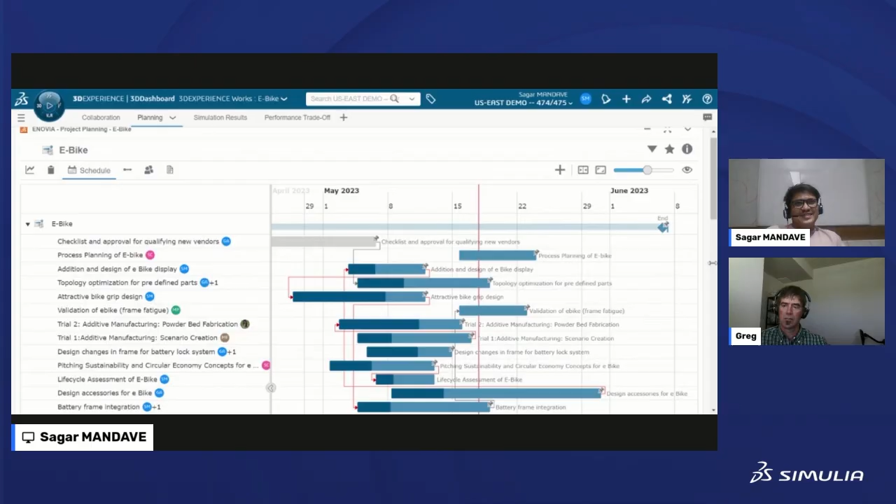So you assigned me just something like this. Yes, it was assigned to you, and you finished way earlier. Oh, good. Okay, good, good.

So in project planning, this is a tab where you can see the overview of your task and how it is going. Along with that, we have the collaborative task where you can filter out what tasks are assigned to you. So basically, here is a filter icon. If I filter it by status, then these three columns will be there. If I filter it by maturity, then draft, to do, in work, in approval and completed. So this way you will get your tasks assigned to you or owned by you.

And if you click on any one of them, let's say I'm working on the topology optimization for predefined parts. This is a task, and if I open it, double click on it, then this is the title, description, the parent project. You can set the priority as well. Maturity is there, percent complete. So let's say currently it says 35% is completed, and Greg and I work on this together today and it comes to 50, then you can drag it to set that it's 50% done.

A little more, like 75. Yeah, the deadline is very close. 19 May is the deadline for that. So you can set the actual start and planned end for that. Estimation dates are there, and let's say if you have some attachments, any image or Excel file or any CAD for that matter, you can upload and attach it over here. And here you can see the responsible file folder. Common space is a collaborative space where you can see all the attachments.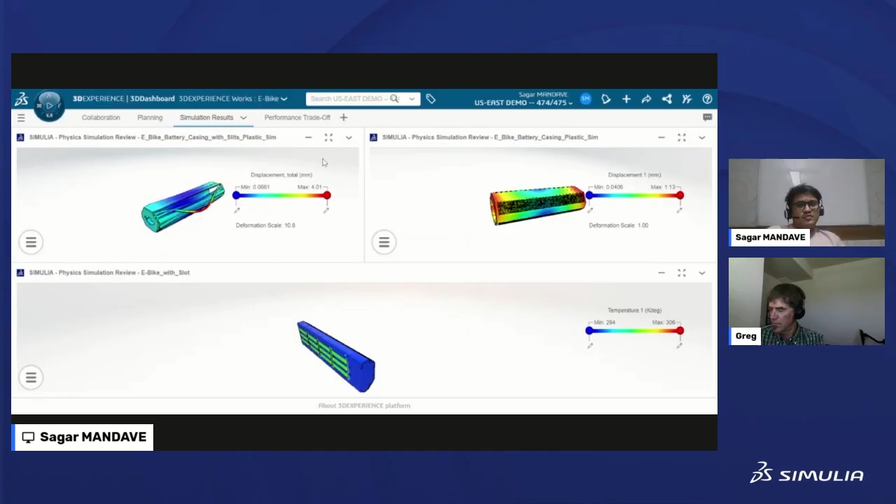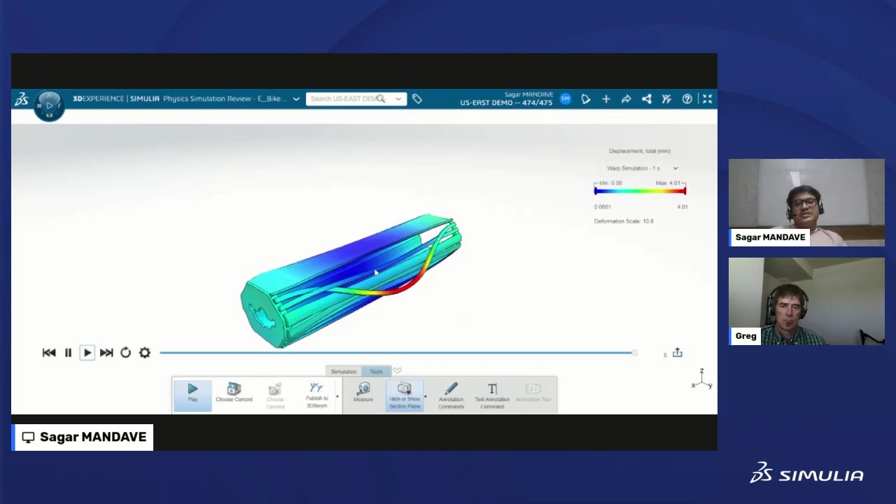So this is the most important phase, planning and task assigning. After that, if you have simulation results and you want to review them: let's say this object is the casing of the battery module of an e-bike, and we have done a plastic simulation over here, a warp simulation. If I play this, you will see the animation, and one particular strip is coming out, deforming way higher.

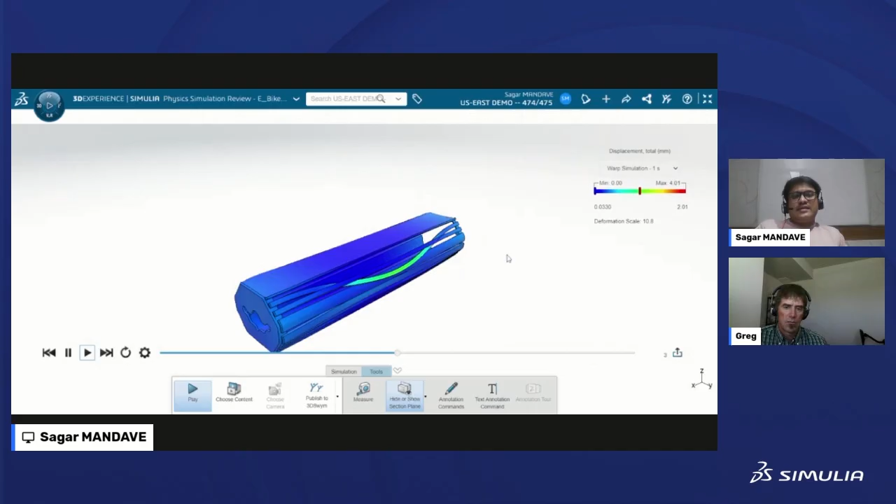So a question might be, hey Sagar, this looks very unrealistic. Is it the real thing? The strip is coming out far away from its original position. It's just because it has a deformation scale. So while exporting... yes, go ahead. Great. Yeah, so this is to Sean's question earlier about results. Thanks for sending that question through. Here we can obviously see the results.

Yes, we can always see the results. We have a set of capabilities where you can review results, you can comment on them, go back to design in SolidWorks, make some changes, come back to the platform and rerun it.

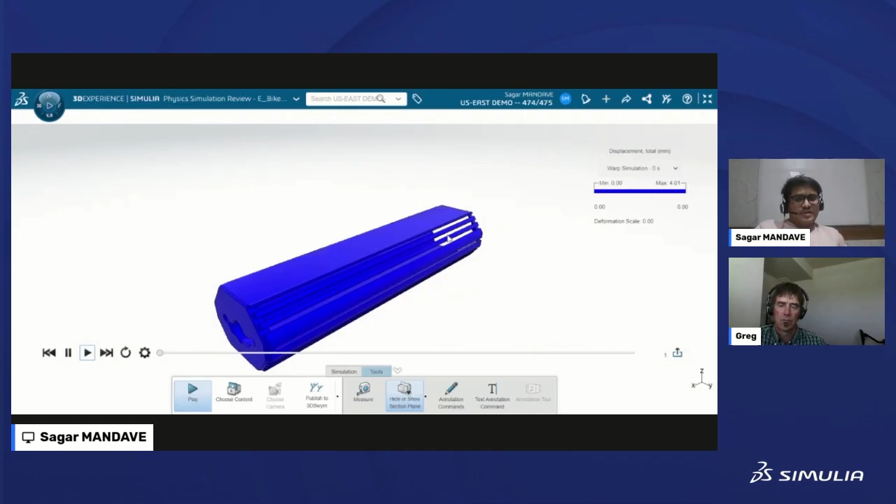Yeah, so this is a warp simulation with a 10.8 deformation scale. That's why it looks unrealistic. But if I set the deformation to 1, then it will probably be too small to identify or notice what deformation there is in a warp simulation.

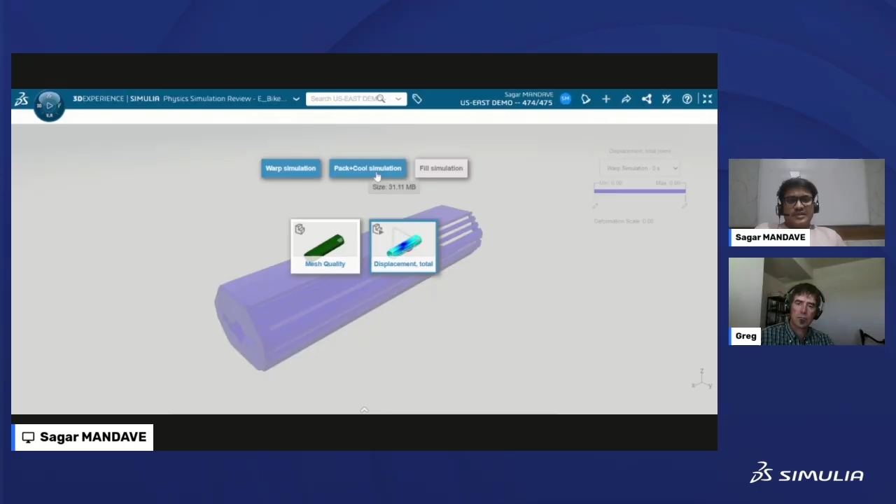So here you can have a different set of content. For these particular simulation results, I have mesh quality and displacement total in a warp simulation. Then for pack and cool simulation, there will be pressure and temperature variations, and for fill simulation, these many results. Output requests were set while submitting the simulation.

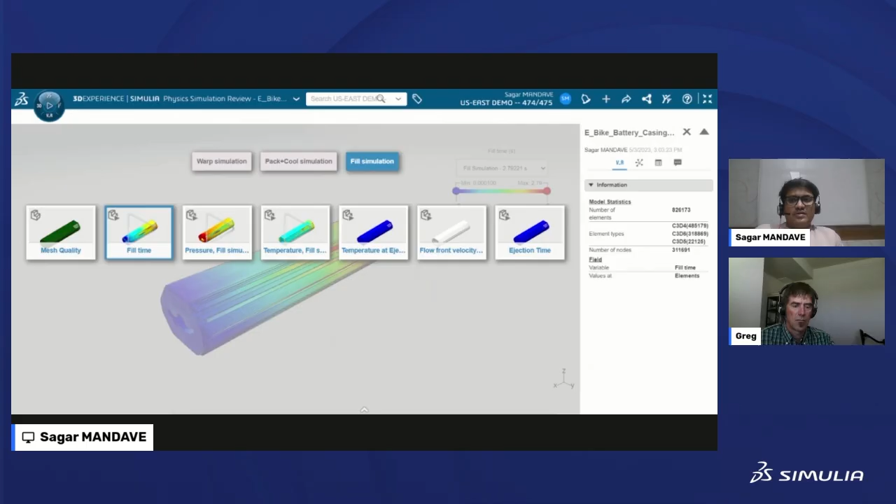So while submitting the simulation on cloud, you just need to make sure that you toggle on generate 3DEXPERIENCE content. If you generate that, it will be lightweight content. You can easily see it in 3D Play or in simulation result review. So this way you can select whatever simulation results you want to see.

And after that, I will go to the performance trade-off. Everything I'm showing right now is part of the 3DEXPERIENCE Works simulation portfolio. So if you have alternative designs and you want to perform a trade-off between those designs, then this is a tool for you. Here we have an e-bike motor performance trade-off with three alternative designs and requirements. These are all requirements data sets. You can easily filter them over here.

So let's say I want to target only these requirements, where total motor mass is the first priority, and I have set it as minimize total motor mass. So are these results from like a DOE, a design of experiments, and then it's just showing you the variations of those?

Yes, yes. So we performed a DOE on e-bike motor performance, and there were hundreds of results, out of which this is the baseline motor design. Then we consider intermediate as design iteration 25, and this is the best one, having rank 1, score 100. So if you target these requirements and prioritize them, let me show you one, let's say total motor mass. This is where you can set your priority out of 5.

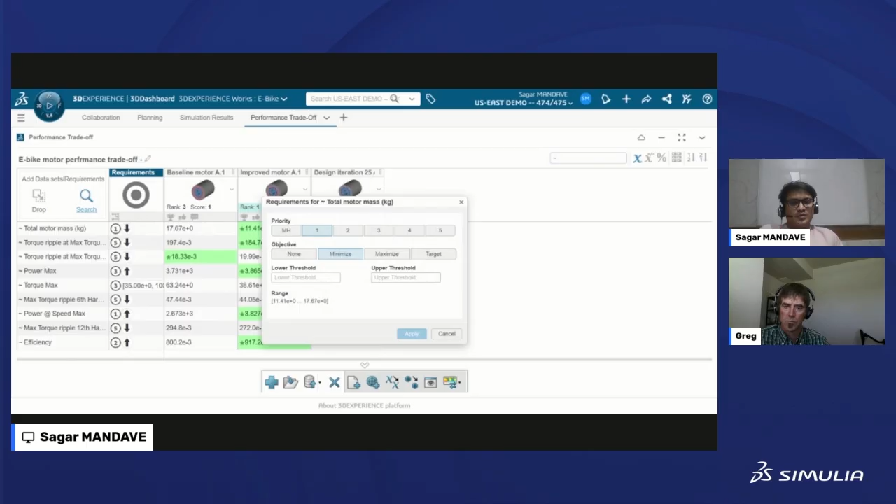Then the objective. If you want to maximize it, or if you have a specific target, you can also add that. Even a range, just like this torque maximum, having a range from 35 to 100. So if you want to have a threshold, you can have it, just set it as is, and the platform will perform it at the back end and give you results.

So basically, what do I do? I just set up my simulation and give it parametric boundaries or whatever, and then it stores the results that I tell it to store for each iteration, and then I don't have to look at those individually. I can use this tool to help pinpoint which ones are the best performing. Correct, correct.

And you can go for several iterations, so it's not necessary to limit it, like doing it manually with just 10 iterations. You can go for hundreds and thousands of iterations, depending on the time you have for your project. So for this particular motor, we went for 100 iterations, and out of those, this middle one is the best or optimum one. Cool. So by using performance trade-off, you can directly choose which best suits your requirements.

So this is about performance trade-off and collaborating on a dashboard. If anyone has questions, please shoot. I am ready to answer. I think we are on time.

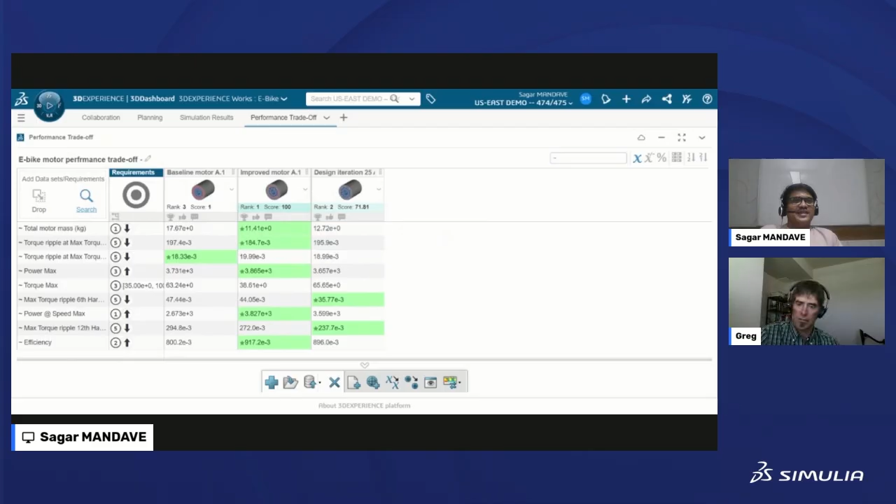Yeah, this is great, thanks. I know a bit about doing structural simulation, but that's what's going to be fun for me following this series along: I'm no CFD expert. And in the dashboard, don't tell anybody, but I'm really bad at the stuff in the dashboard. So this is great. I'm really enjoying seeing this myself, because I haven't spent a lot of time in there. This is awesome, just that way to collaborate with other people. Yes, really.

Nice. I mean, nobody likes email, right? I think I even saw that in the comments. Oh man, yeah, email's tough. Yeah, exactly. A comment. Maureen says she doesn't like email in the middle of the day. I don't like email any time of day, because email, chats, messages, sometimes it gets confusing. Yes. You get lost in email conversations. Yeah. So that's really good.

Let's see. So thanks for showing that. Let's scroll through and see if we have any other questions that we haven't answered along the way. I think there was a question earlier that Ryan answered about. Yes, about boundary conditions. That's the one that I was going to get to. Yeah, setting up boundary conditions in a simulation.